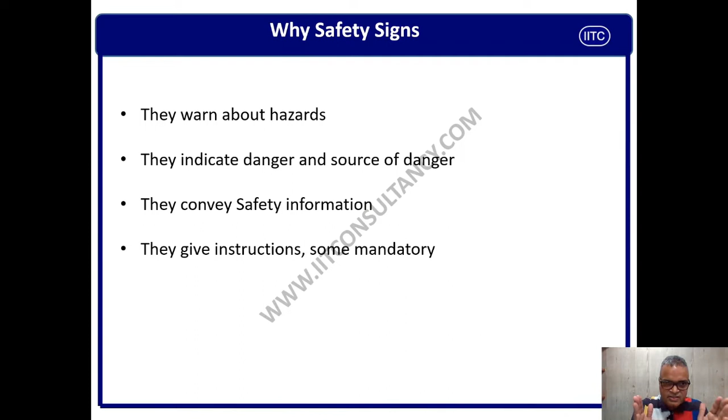You can also say they convey safety information. Sometimes the safety signage gives information regarding using the safety helmet or goggles, so that you don't forget to use the safety PPE. Although this is a point of safety culture, PPEs are to be used all the time - this is one of the reasons we have to put safety signage everywhere, so people are reminded to use the correct PPE. They also give instructions and mandatory information. So this is the reason why we need safety signage.

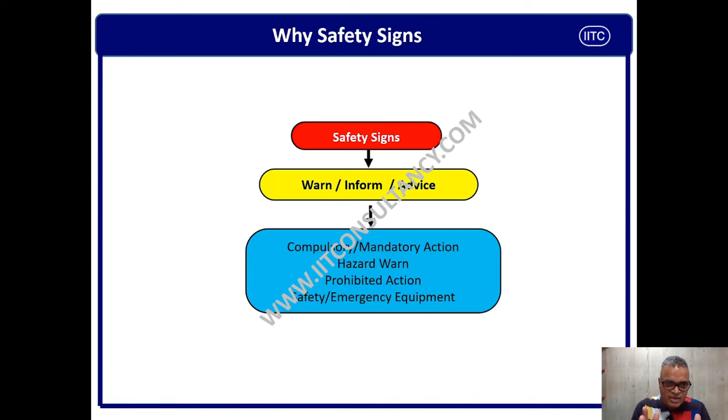So guys, the safety signages are of different types. The red safety sign will warn you, inform you, or advise you. Going further, there are compulsory safety signages, mandatory actions, hazard warnings, prohibited actions, and safety and emergency equipment signages. Depending on the requirement, the hazard, and the situation, you have to choose the right safety signage so that you can display the right one at the right place, so that people can be benefited by and large.

Responsibility. Now the question is, whose responsibility is it to put or display the safety sign? The site or plant manager is responsible to decide which type of safety signage is required based on the hazards, based on the risk, and where they have to be displayed or posted based on the risk assessment.

So every site must have a responsible person in charge of safety sign maintenance. Maintenance means they have to identify the area, select the right type of safety signage, display the safety signage, and ensure that safety signage is always in good condition.

All personnel are responsible to take care of their duty and report illegible, damaged, removed or invalid safety signs. Sometimes you display a safety sign at various locations, but over a period of a year or two, the signage may no longer be relevant because that hazard may have been removed from that location. So it is everybody's responsibility to identify illegible, damaged, removed, or invalid safety signs at the appropriate location.

Characteristics and important features of safety signage: it should be logical. When putting up safety signage, you must ensure it is displayed logically and is easy to read. If it is not displayed logically - for example, putting a 'use safety helmet' sign when you are sitting in the office - it is not going to help you. You have to ensure that the correct and respective hazard is communicated, otherwise it is not logical and people will not follow it.

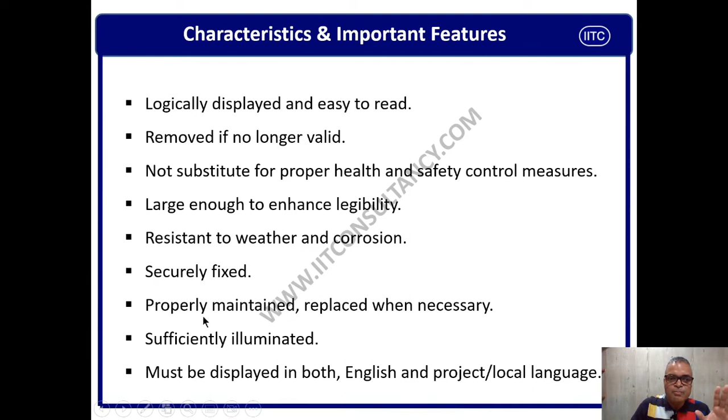So you have to put the safety sign securely, properly maintained, and replaced when necessary. As mentioned, you have to do continuous vigilance and continuous inspection to find the appropriate safety signage at the appropriate location, and irrelevant safety signage has to be removed.

Sufficiently illuminated. We have to ensure that wherever we put safety signage, it should be visible even during night hours or when there is less illumination. These places have to be continuously and consistently illuminated. For example, if you put an emergency exit sign in a storage area, meeting room, or operation area, but people are not able to read it, this is not going to help you. So we have to ensure it is sufficiently illuminated when placing safety signage.

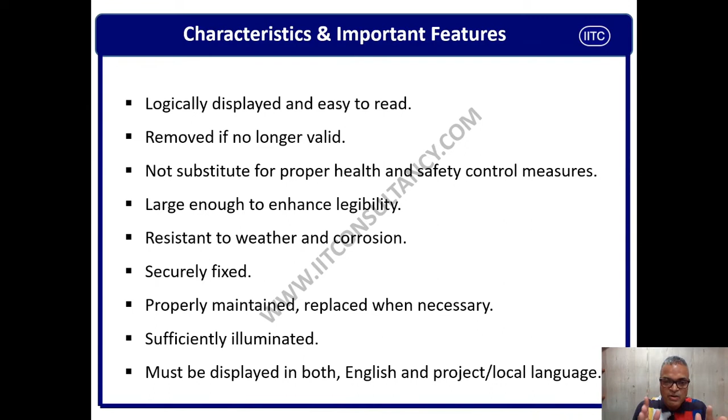Must be displayed in both English and the local language. If we put up a safety sign and it is not readable by the people working there, it is as good as nothing. I hope you understand, correct? So we have to put the safety signage in the appropriate language so there is no problem reading it, and after reading it, the person has to implement it.

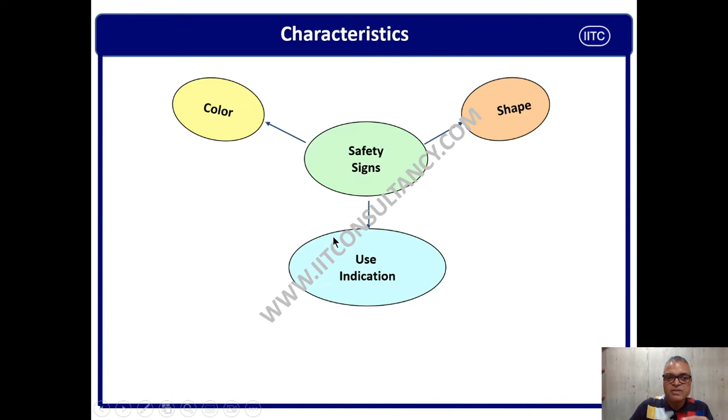The characteristics of safety signages - there are three important topics every safety sign should have. First, safety signages should have the appropriate color. What is the importance of color? We will discuss later. The safety signages should be in appropriate shape and size, otherwise people will not understand or follow it. And we have to use the correct indication, otherwise people will be misguided and misunderstand - this is standard. Why standard color, standard shape, standard indication? Because people are moving from one site to another site.

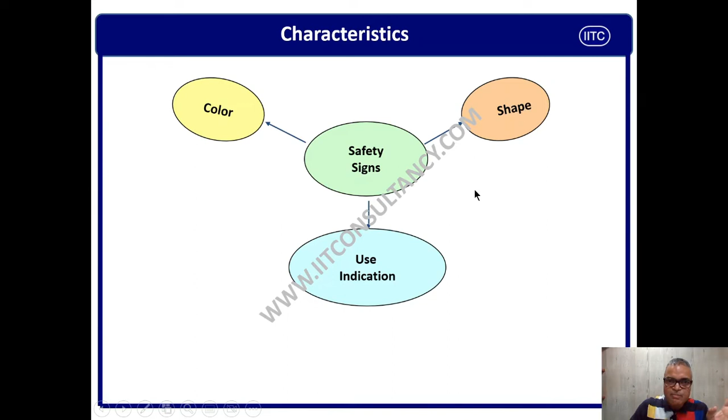People are getting changed, old people resigning and new people coming. That is why we have to use these three characteristics very importantly, which will help you implement the safety signage requirement throughout your site. If you are not following these characteristics, you may be displaying safety signages, but it is not giving much use. Now we will understand the basic meaning of safety signage.

So guys, in this way we have to read and understand the meaning of every symbol, because every symbol has got a different color, a different shape, a different size. You have to understand the meaning of the symbol, the meaning of the color, and the meaning of the message.

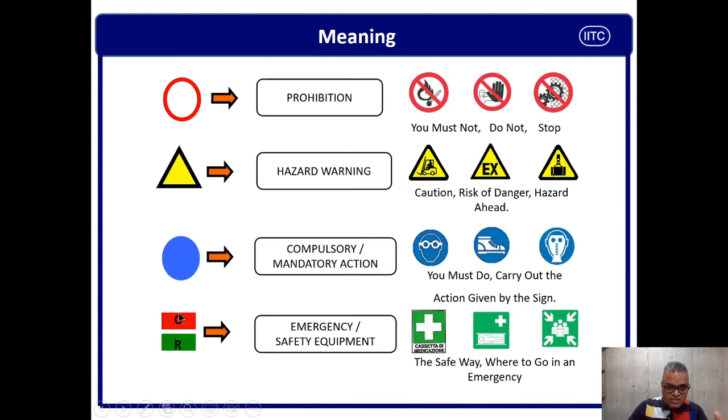So guys, try to understand the different shapes, sizes, and colors - each has a different meaning, and you have to be clear what kind of prohibition signs you can put in your area.

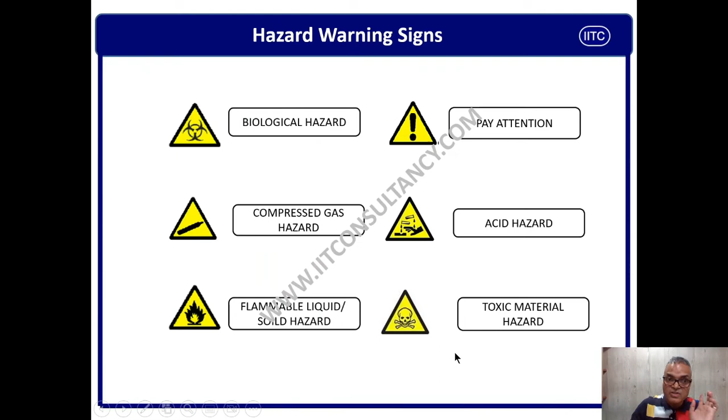Now you can see a skeleton of a human being - toxic material hazard. So guys, you have to be careful with each hazard depending on the shape, size, color, and borders.

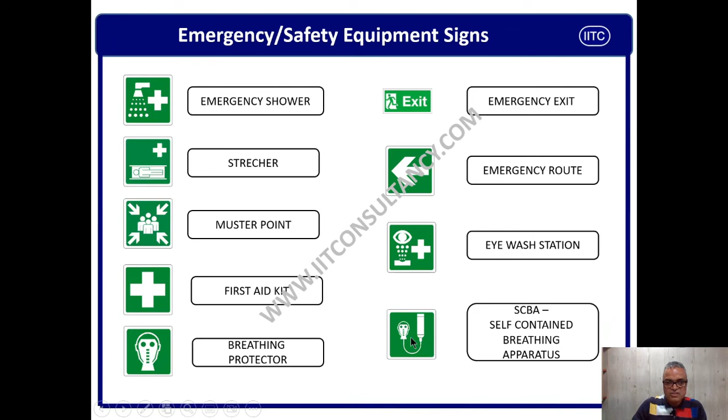This is breathing protector, this is emergency exit sign, this is emergency route, this is emergency eye wash - eye is here and something sprinkling is here, eye wash. This is cylinder, this is a SCBA, self-contained breathing apparatus.

Emergency / safety equipment signage: this is a portable fire extinguisher, this is a fire hose reel or hoses, this is a sprinklers, this is a alarm fire button or MCP, this is a wheeled fire extinguisher, this is a fire hydrant, this is a alarm button, this is a fire blanket, this is smoke detector. So guys, now you are able to understand which symbol represents what.

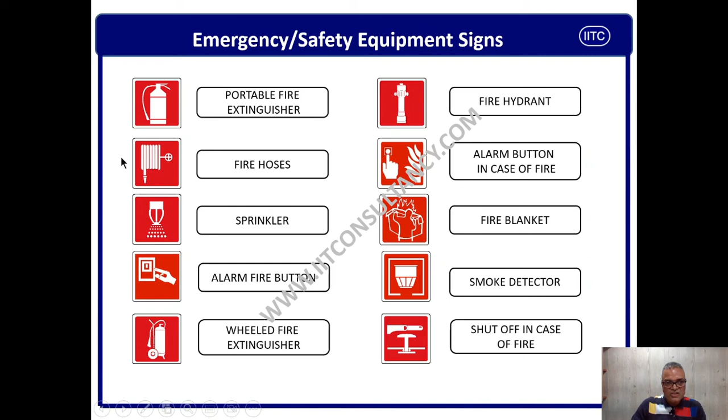Probably we can also see that hazardous label for the chemicals. Label must be posted on the packaging, tins, boxes according to the Material Safety Data Sheet. So this is a flammable material, this is highly flammable. F is flammable, F plus means highly flammable.

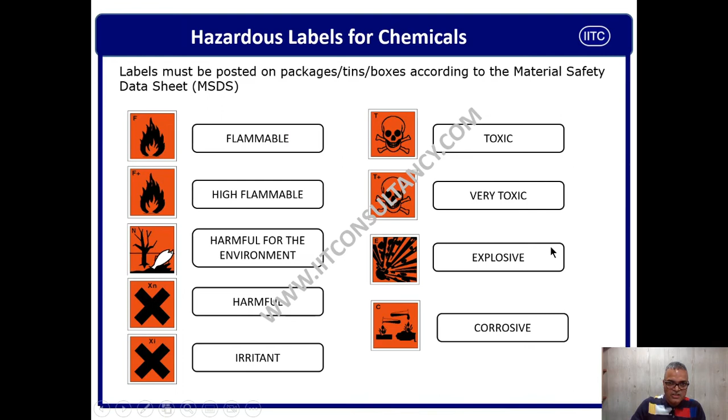This is harmful for the environment, trees are there, this is fish, it is harmful to the environment. This is only harmful, this is irritant, this is a toxic material, this is very toxic material. T is toxic, T plus is very toxic. Explosive material, this is corrosive material. So guys, this is the meaning of hazardous chemical.

Dimension and position: guys, it is very important to identify the correct dimension and position. Signages are to be used if needed. It should be visible, placed orderly and in correct manner. Proper dimension should be there, positioned in the visible and suitable place, otherwise your safety signage is not going to help. Guys, I will not read this for you.

These are the typical dimensions given with a distance. At 4 meter distance, what should be dimension? At 35 meter distance, what should be dimension? If it is closer to the vision, the size is less. If it is farther from the vision, the size is more. S is equal to 910 millimeter. Here S is equal to 115 millimeter. So depending on your size, depending on your vision, depending on your location of position, you have to put this size.

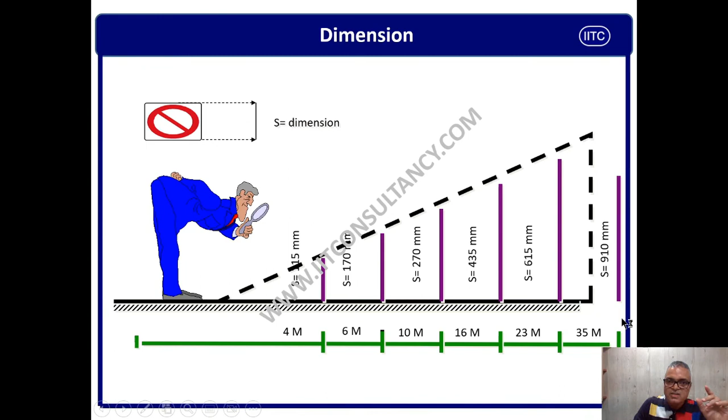Guys, this is barrier. Barrier tape is used to mark out area where access is limited or prohibited, like excavation area, radiographic area, or something being lifted. So this is the tape you can use to warn your people.

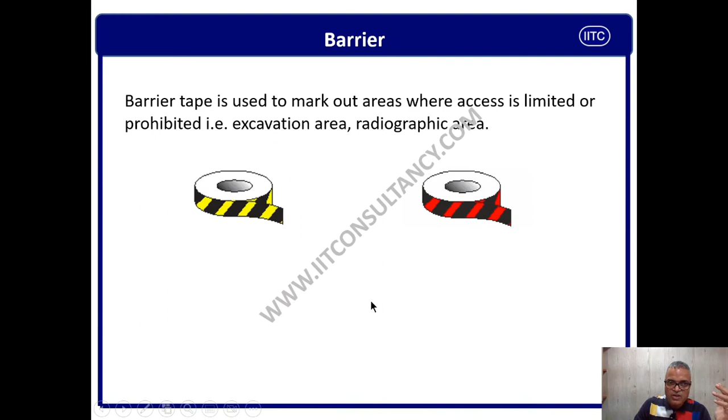Compliance and removal - this is very important because compliance to safety signage is very important. Signs that warn danger or give mandatory instruction must be followed. Personnel must pay attention to information given by sign. No person must deliberately disobey any safety instruction. This is a regulatory as well as this is breach of safety rules.

Removal: it is prohibited to interfere or remove any safety signage or barrier if not authorized to do so. Disciplinary action can be used if you are found that you have removed some safety signages.

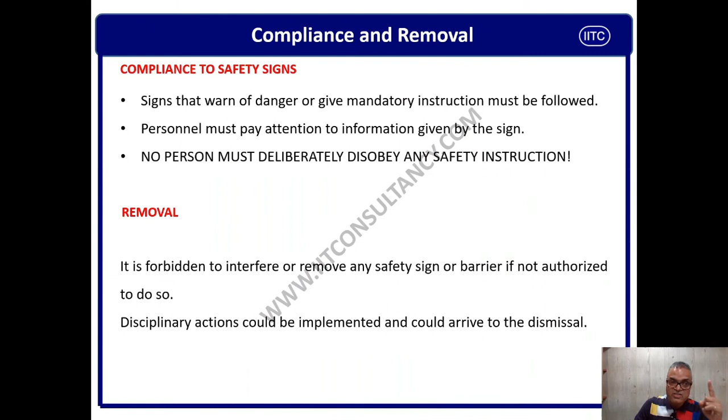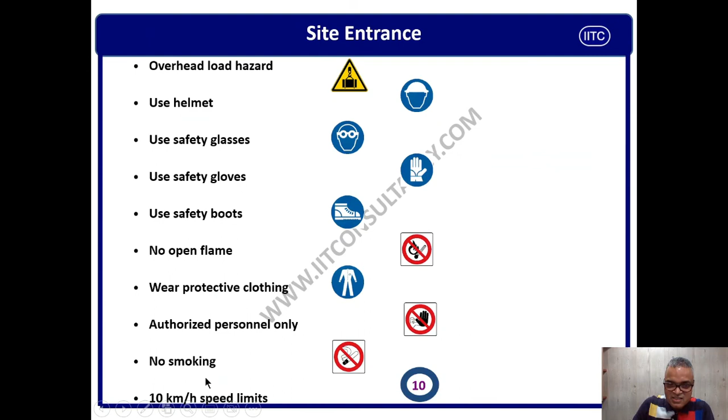No open flame, use of protective clothing, and authorized personnel only. This is no smoking, this is speed limit. So guys, you can use this as a site entrance if your site is under construction, or you can also use these safety signages if you are in operation, but you need to customize these signages as per your requirement. I am giving a generic information to you.

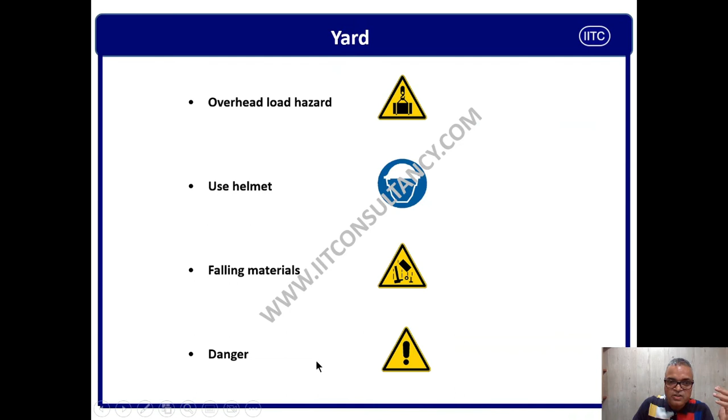So guys, again I am saying that these are the examples. You need to customize your area depending on your requirement.

This is mechanical workshop. If you are having a lathe machine, milling machine, you can put this kind of display. Use of face shield, use of safety goggles, use of safety rule for fixing the grinding machine, fire extinguishers, eye wash stations, emergency route and emergency exit.

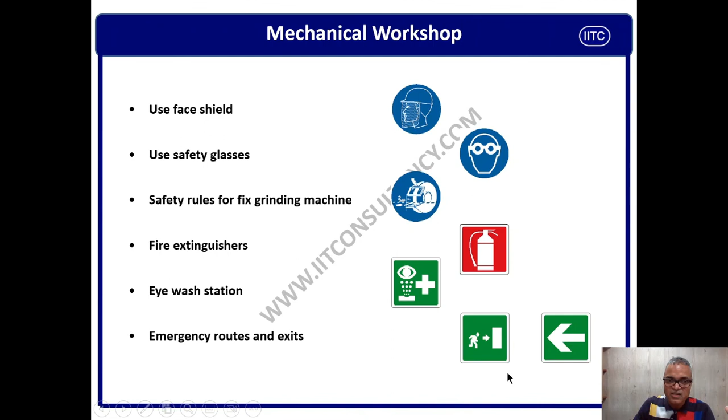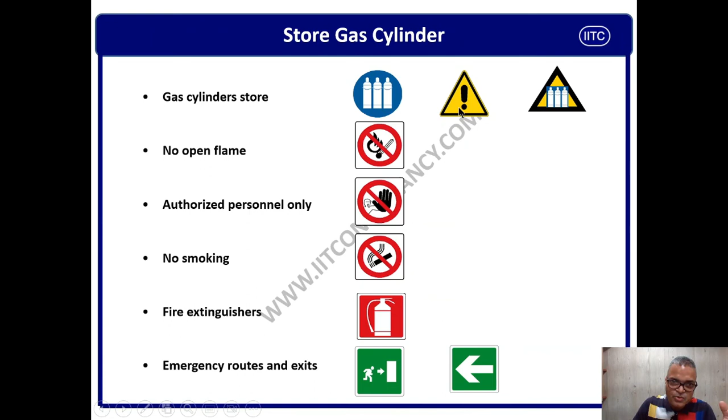These are the safety signages when you are going to store the gas cylinder. So guys, I am not reading it, you can take it your own time. You can customize it as per your own requirement.

This is the safety signages we are going to use in the electric room. Authorized personnel only, high voltage area. Fire extinguishers to be displayed. Use insulated boots, use rubber gloves. Connect an earth terminal to the ground. Emergency escape route, don't use water in case of fire.

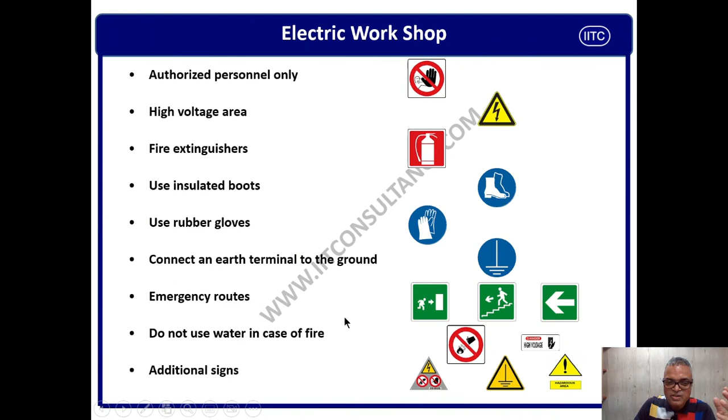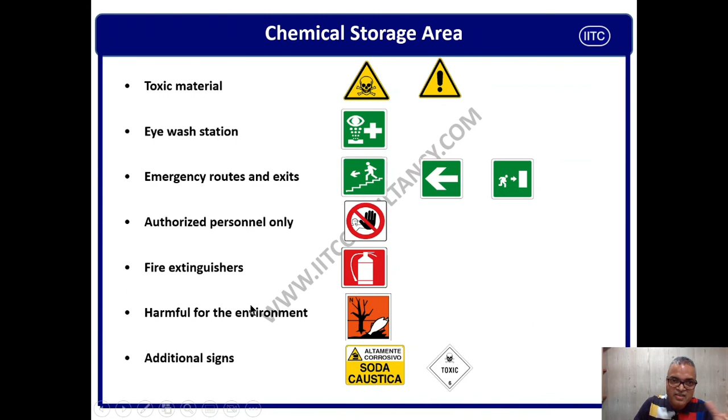Additional signages you can put depending on your requirement. You need to customize your chart as per your site location about your hazard. This is chemical storage area. You can choose some of these or most of this or all of this, or you can also add some more depending on your hazard, depending on your chemical, depending on your MSDS.

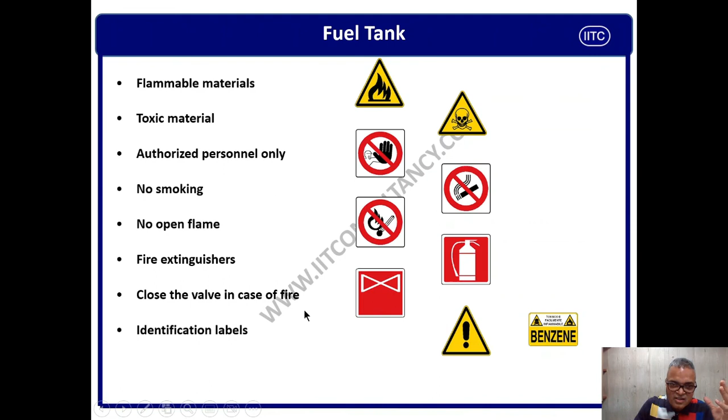These are the safety signages can be used when you are going to have the fuel storage tank, when you are going to have day tank. Flammable material, toxic material, authorized person only, no smoking or no open flame, fire extinguisher, close the valve in case of fire, identification labels.

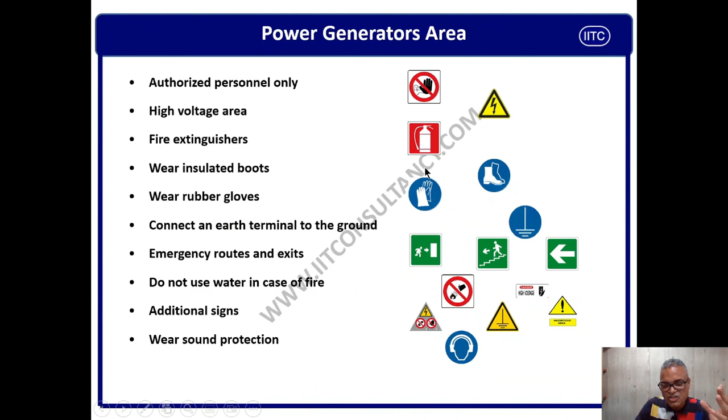This is the symbol and types of safety signages you can use in powerhouse, in DG area, captive power plant area. I am not going to read it line by line. This is self-explanatory. Please customize this requirement as specific to your requirement.

Guys, always strictly respect all the safety signs. Never change, replace or remove safety signs unless you are authorized to do so. If you notice a safety sign has been damaged or illegible or removed, report it immediately to your supervisor. Beware of safety signage, this may save your life and others. Safety depends on you too.

So guys, these were the things we have explained in this session. I hope you enjoyed this session.

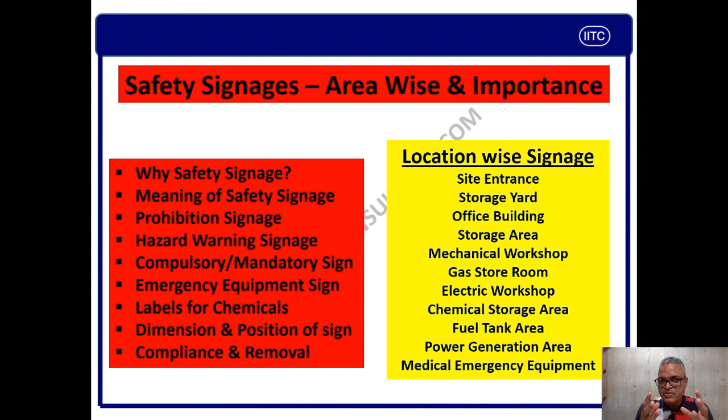So these are the questions we have seen in the session. If you have any question related to this, please feel free to put in the comment section.